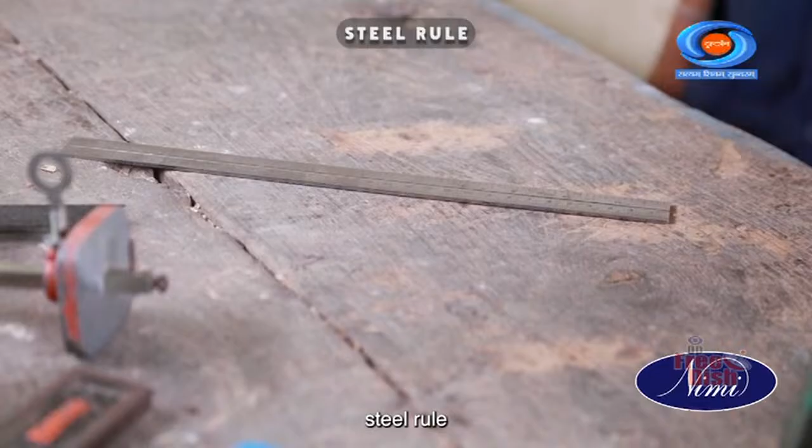Before we begin making the common dovetail joint, let us first have the tools ready in hand. The tools which we need are marking knife, steel rule, measuring tape, pencil, try square, cross-cut saw, bevel edge chisel, mallet, vise or bench vise, and jack plane.

Let's begin by taking two wooden pieces. Cut and trim them to the required size. Step 1: The first stage is to mark out and cut the tail.

Place one piece of wood vertically on top of the other as shown. Draw a line on the horizontal piece A that marks the thickness of the vertical piece B. Now use the marking knife or marker pencil to mark the dovetail.

Step 2: Repeat the same procedure for wooden piece B as done for wooden piece A. Place wooden piece A vertically on top of wooden piece B as shown and mark the line with the marker pencil.

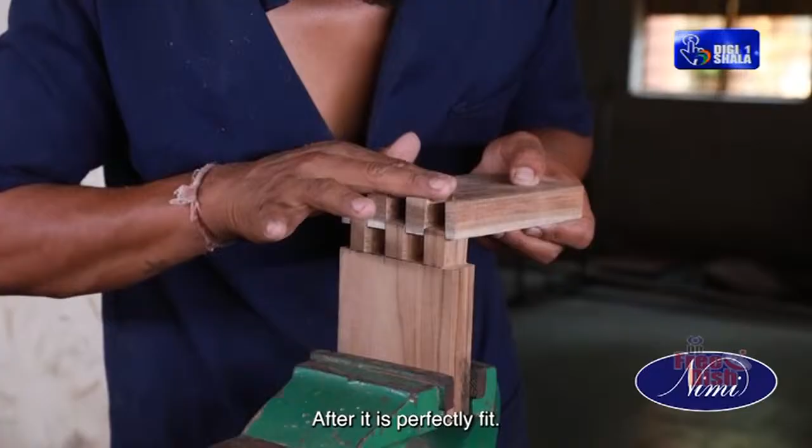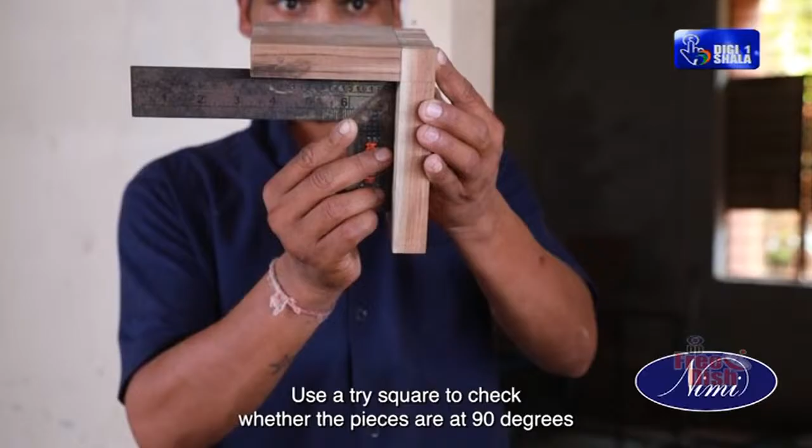use a try square to check whether the pieces are at 90 degrees with each other. Now you have the common dovetail joint made ready.

Let's quickly recap.

In this video, we have learned how to make a common dovetail joint and also the simple technique to make it. Hope you have understood everything taught in this session.

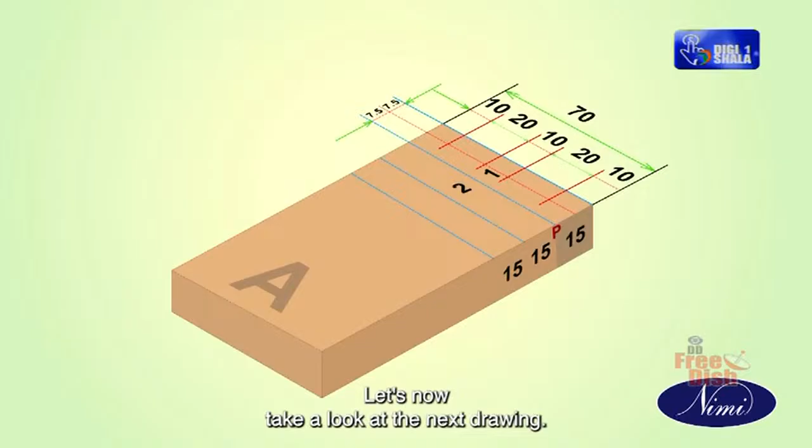Let's now take a look at the next drawing. Draw a line at a distance of 15 millimeters from line P, and label this region between the two lines as 2. Now draw another line at a distance of 15 millimeters away from the new line we just drew, and name the area between these lines as 3.

Now separate the new line into 2 equal parts. With try square and the scriber, mark only the lines indicated with thick green lines as shown on the drawing, using the marking knife or marking pencil. Then the regions inside 1 and outside the 20 millimeters lines can be shaded using a pencil.

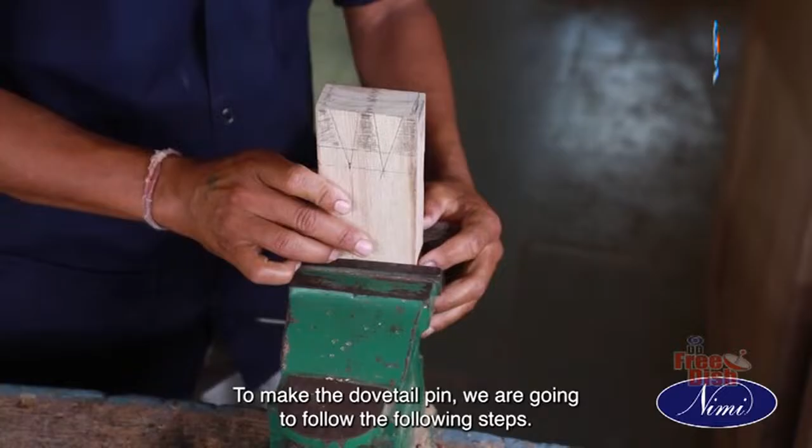Now we need to make the dovetail pin on the wooden piece A. To make the dovetail pin, we follow these steps: fix the piece A vertically in the vise or bench vise.

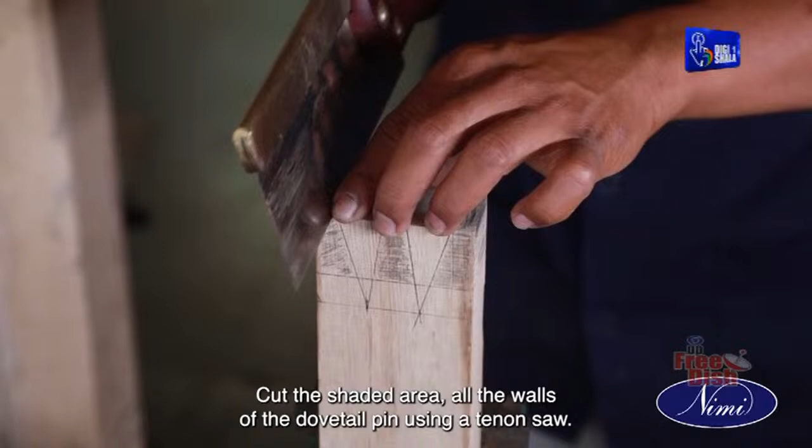Cut the shaded area, all the walls of the dovetail pin using a tenon saw. Saw on the waste side of the marking outline, perpendicularly to the sides of the piece and up to the gauge line. Remember to cut a little away from the line so that you can finish off neatly with a chisel later.

Chisel out the waste of the dovetail pin with a bevel edge chisel or firmer chisel. Cut out small pieces of waste until the gauge line is reached. Repeat the procedure for the other dovetail pins also. If necessary, clean the dovetail with chisel and mallet.

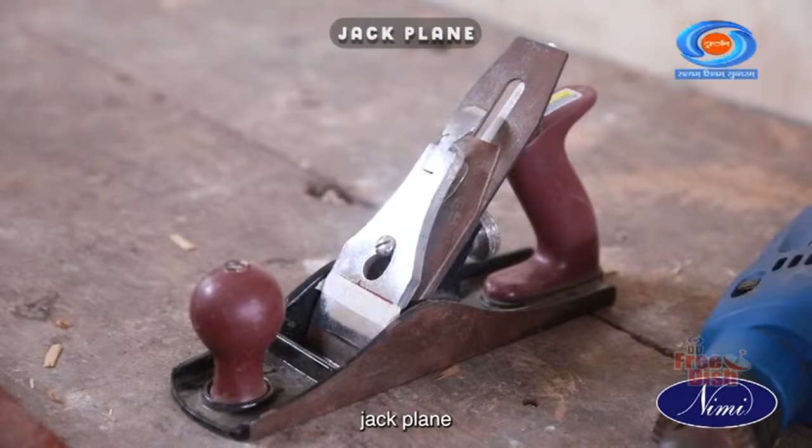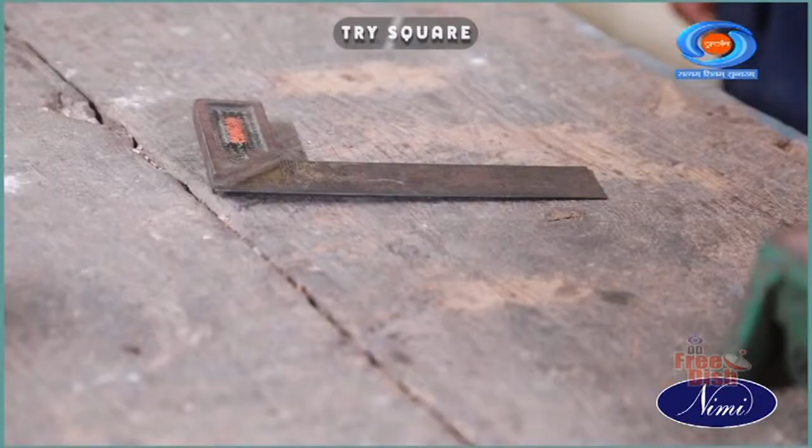Let's start. Gathering equipment needed to make rebate butt joint: wooden piece of dimension 80 x 20 x 450 mm, 2 numbers; jack plane; marking knife; bench vise; rebate plane; steel scale; measuring tape; try square; smoothing plane; wood glue; bench stop.

Making the rebate butt joint. Check the wooden pieces for its size. Use measuring tape for checking the dimensions. Plane it to size of 80 x 20 x 450 mm, 2 numbers, using jack plane.

Hold both the planks side by side in a carpenter's vise. Then mark a section of width 20 mm throughout the length of both the wooden pieces.

Then mark a depth of 10 mm along the sides that were marked in the previous step. We should get wooden pieces as marked in the diagram.

Keep the marked plank against the bench top on the workbench. Take a rebate plane of adjustable type and make the rebate on both sides. Check its squareness and flatness of the rebate with try square. Repeat all the previous 3 steps on the other piece of wood as well.

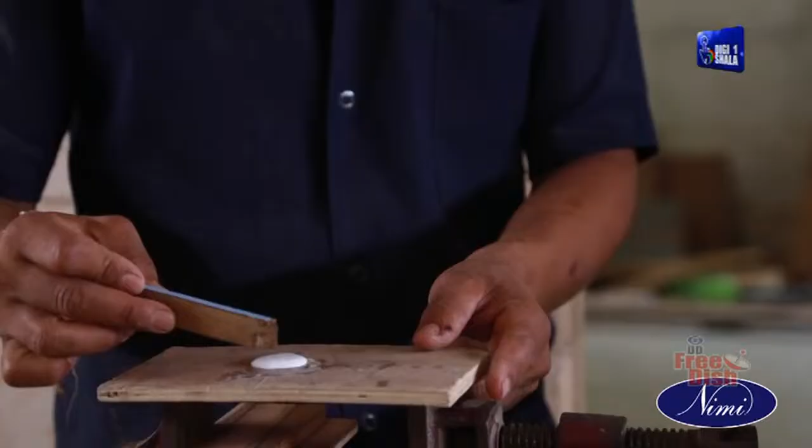Keep both the planks together and check its alignment. Apply glue on the rebate part of both the planks and fix both the planks along its rebate. Just move to and fro to spread the glue evenly and clamp it.

Allow glue to dry, then remove the clamp. Once the glue has dried, finish the joint using smoothing plane.

Facts about rebate butt joint. The rebate joint is usually used as a corner joint because rebate joint in itself is quite weak. It is usually strengthened with nails, screws or staples. These strengtheners also bind the joint while the glue is hardening. It is also possible to use dowels as strengtheners if the dimensions of the joint allow that.

Application of rebate butt joint. It is used in a variety of projects including widened joints, framing, carcase construction, timber paneling, securing two narrow pieces together, and corner joints.

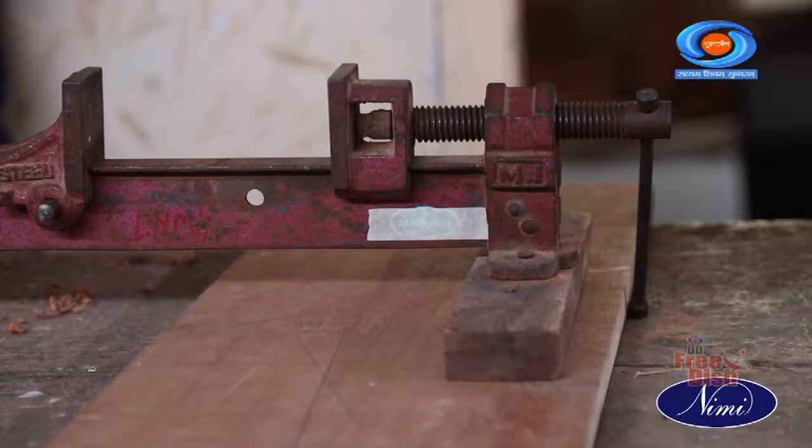Let's start. Gathering equipment needed to make secret pocket screw butt joint: wooden piece of dimension 90 mm x 20 mm x 450 mm, 2 numbers; jack plane, pencil, T-clamp, mallet, firmer chisel, 35 mm x 8 mm screws (3 numbers), tri-square, ratchet brace, screwdriver, straight edge, and measuring tape.

Making the secret pocket screw butt joint. Check the dimensions of the two wooden pieces and make sure that it is of the size 90 mm x 20 mm x 450 mm. If not, then plane it until we reach the required size.

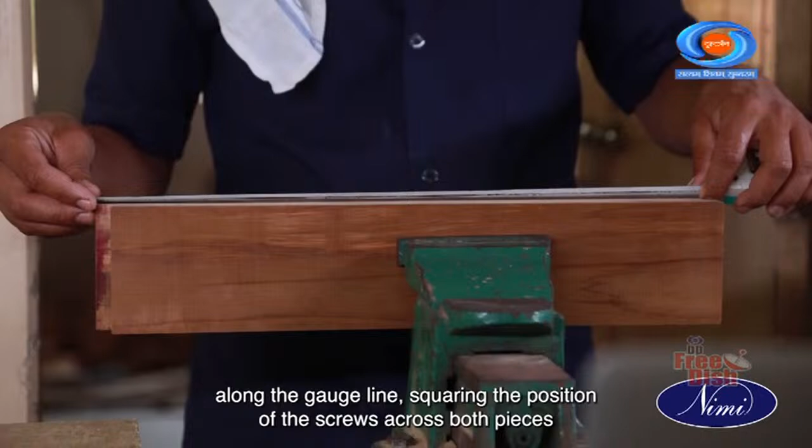Mark the distances 50 mm, 225 mm and 400 mm along the gauge line, squaring the position of the screws across both pieces using a tri-square and pencil.

Make 3 pilot holes of diameter 2 mm at 50, 225 and 400 mm as shown in the sketch, to a depth of 25 mm using hand drill.

Fix the 35 x 8 screws on the pilot hole and drive it to a depth of 25 mm on the plank using a screwdriver. The length of the screw above the wood in plank B should be slightly less than the depth of hole in A.

Adjoining the hole, mark a slot of size 10 mm x 8 mm x 20 mm on the right side of the hole. Chop off the slot wood layer by layer using firmer chisel up to the required thickness.

Assemble the plank so that the screw head of plank B enters the bore of plank A. Clamp parts A and B at equal levels. Tap gently the part B to the left using T-bar clamps.

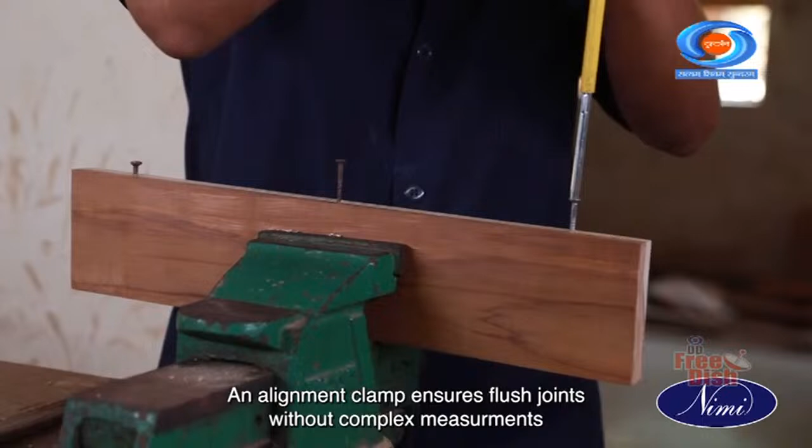Application of secret pocket screw butt joint: face frame construction, table aprons, drawer box, utility cabinets, and wooden furniture.

Let's quickly recap. To make a secret pocket screw butt joint, take 2 wooden planks. In the first wooden plank, mark them for drilling and drill pilot holes of 2 mm diameter. Insert a 35 mm by 8 mm screw, driving it 25 mm deep into the plank.

Clamp them together and use a wooden mallet to align them, then remove the clamp and check for its flatness. Hope you understood everything taught in this session.

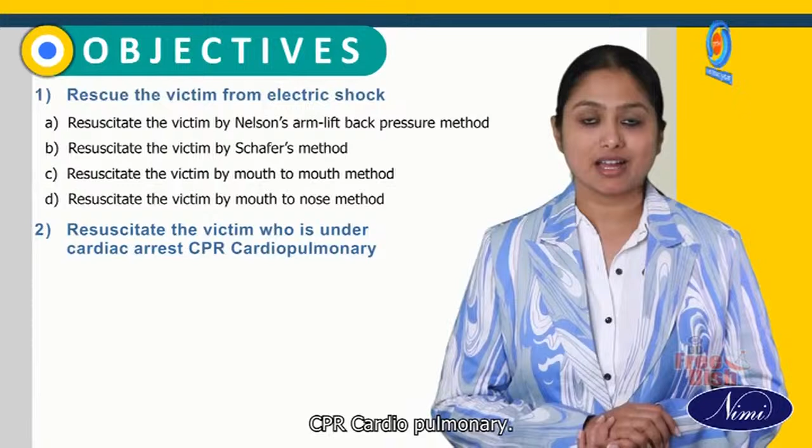The objectives of this video are: after the session you will be able to rescue the victim from electric shock, resuscitate the victim by Nelson's arm lift back pressure method, resuscitate the victim by Schafer's method, resuscitate the victim by mouth-to-mouth method, resuscitate the victim by mouth-to-nose method, resuscitate the victim who is under cardiac arrest using CPR, cardiopulmonary treatment for a victim who is bleeding, and using a fire extinguisher to put out fires.

Practice on workshop safety and discipline. Let's start: rescue the victim from electric shock.

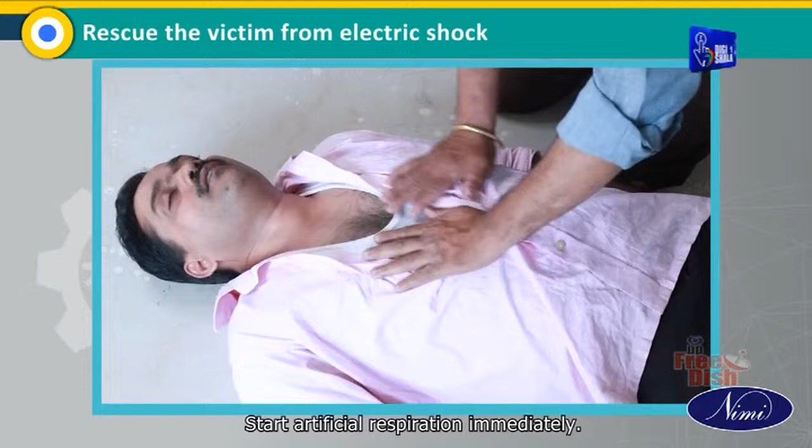Loosen clothing that may interfere with the victim's breathing. Remove any object, including false teeth, from his mouth. Bring him to ground level. Start artificial respiration immediately and call for a doctor.

Resuscitate the victim by Nelson's arm lift back pressure method. Place the victim as shown. Kneel such that your knees are near the victim's hands.

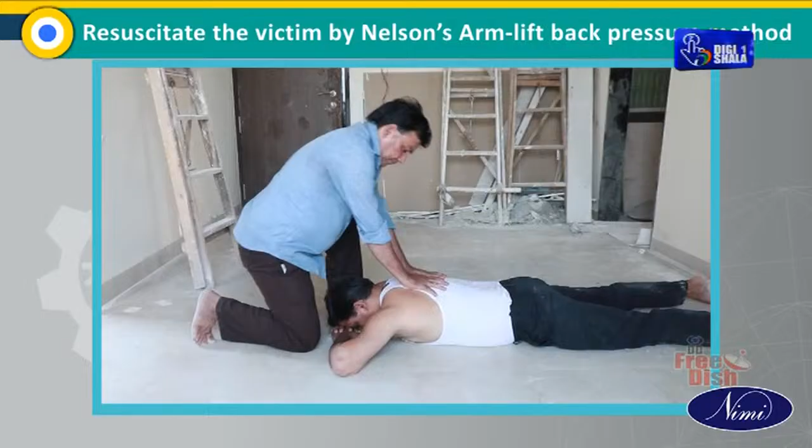Place your hands on the back of the victim. Gently bend forward, keeping your arms straight until they are nearly vertical and steadily pressing the victim's back. When bending back, your hands should slide down the victim's arms and grasp his upper arm just above the elbows.

When you bend back completely, pull the victim's arms towards yourself gently. To complete the cycle, lower the victim's arms and move your hands back to the initial position. Do this until the victim starts breathing naturally. Do not give him any stimulant until he is fully conscious.

Resuscitate the victim by Schafer's method. Place the victim and kneel over them as shown. The victim's thighs should be between the rescuer's knees. Place the hands and fingers as shown.

Gently bend forward, keeping your arms straight until they are nearly vertical and steadily pressing the victim's back. This forces air out of the victim's lungs. When you bend back completely, remove all the pressure on the victim. This allows air to fill back into the lungs.

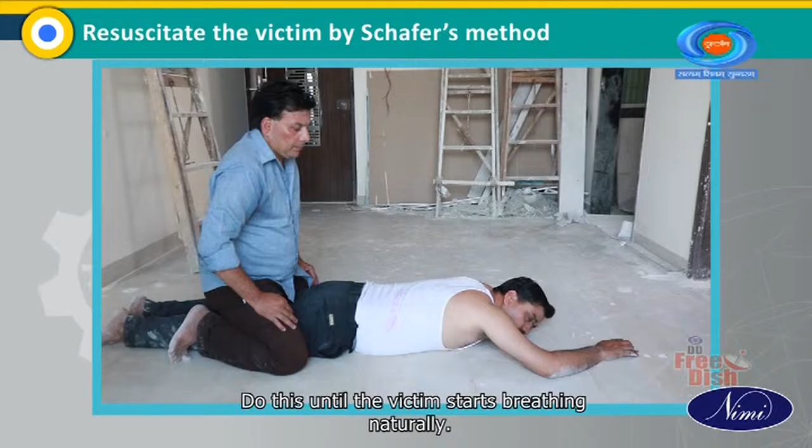After 2 seconds, swing forward again and repeat the cycle 12 to 15 times a minute. Do this until the victim starts breathing naturally.

Resuscitate the victim by mouth-to-mouth method. Place the victim as shown. Tilt the victim's head back. Use your fingers to position the upper and lower jaws as shown.

Take a deep breath and place your mouth over the victim's mouth as shown, making airtight contact. Close the victim's nose. If you dislike direct contact, place a porous cloth over the victim's mouth. For an infant, place your mouth over his mouth and nose.

Blow into the victim's mouth gently, in case of an infant, until his chest rises. Remove your mouth and release the hold on the nose to let him exhale, turning your head to hear the rushing out of air. The first 8 to 10 breaths should be as rapid as the victim responds. Thereafter, the rate should be slowed to about 12 times a minute, 20 times for an infant.

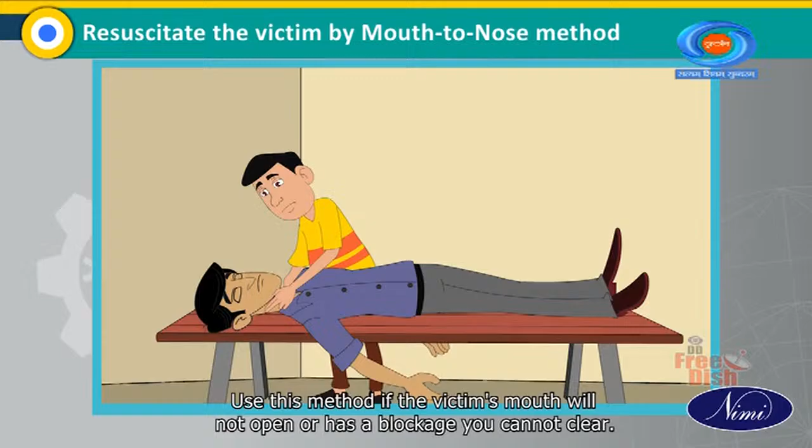Resuscitate the victim by mouth-to-nose method. Use this method if the victim's mouth will not open or has a blockage you cannot clear. Use your fingers to shut the victim's lips. Firmly place your lips around the nostrils and breathe into them. Note if the victim's chest is rising and falling. Repeat this 10 to 15 times until the victim responds. Continue this exercise till the arrival of the doctor.

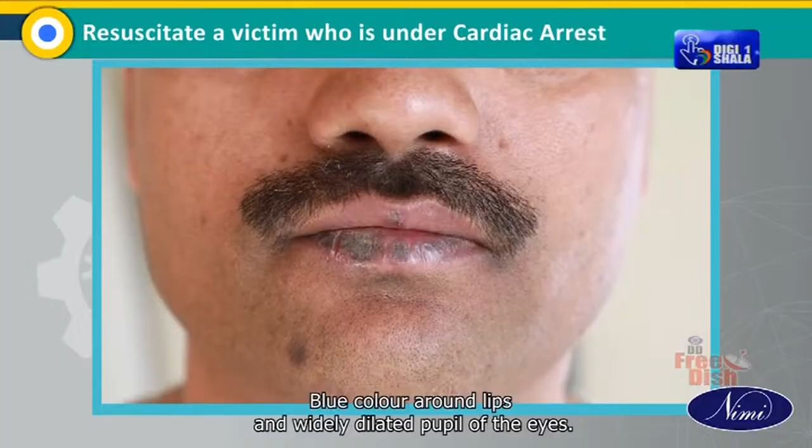Resuscitate a victim who is under cardiac arrest. Check quickly whether the victim is under cardiac arrest. In cases where the heart has stopped beating, you must act immediately. Cardiac arrest could be ascertained by the absence of the cardiac pulse in the neck, blue color around lips, and widely dilated pupil of the eyes.

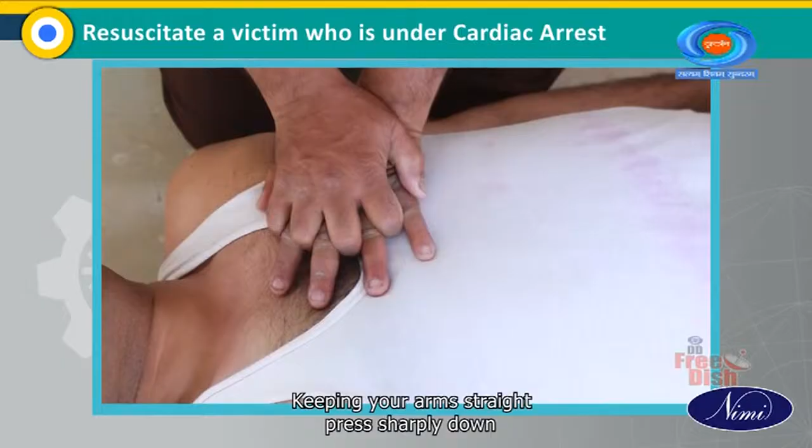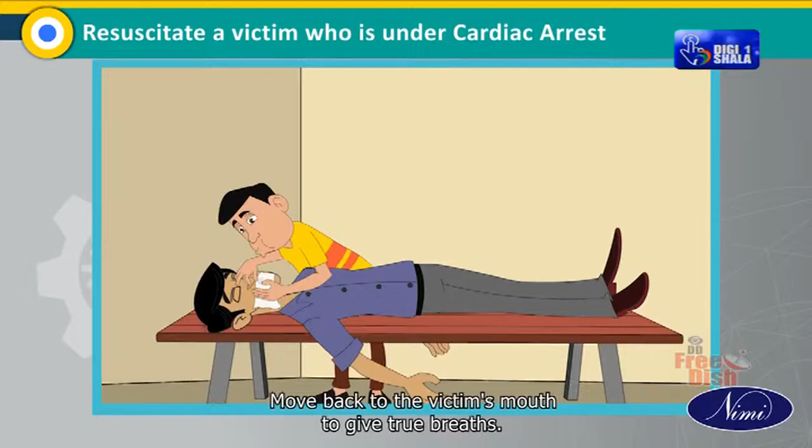Lay the victim on their back on a firm surface. Kneel alongside facing the chest and locate the lower part of the breastbone. Keeping your arms straight, press sharply down on the lower part of the breastbone, then release the pressure. Repeat the previous step 15 times at the rate of at least once per second. Check the cardiac pulse. Move back to the victim's mouth to give two breaths, mouth-to-mouth resuscitation.

Continue this cycle of 15 chest compressions followed by 2 breaths. Check the pulse frequently. Stop the compression if the heartbeat returns and stop the mouth-to-mouth breathing if natural breathing returns. Place the victim in the recovery position as shown. Keep him warm and get medical help quickly.

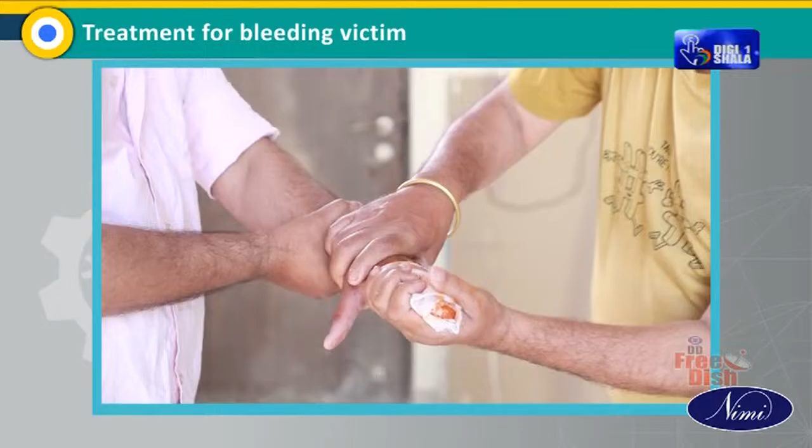Treatment for a bleeding victim: determine the location of the bleeding. Elevate the injured area above the heart if possible. Apply direct pressure to the bleeding area with a sterile cloth. Keep the pressure on for 5 minutes. Check to see if the bleeding has stopped. If not, apply further pressure for 15 minutes.

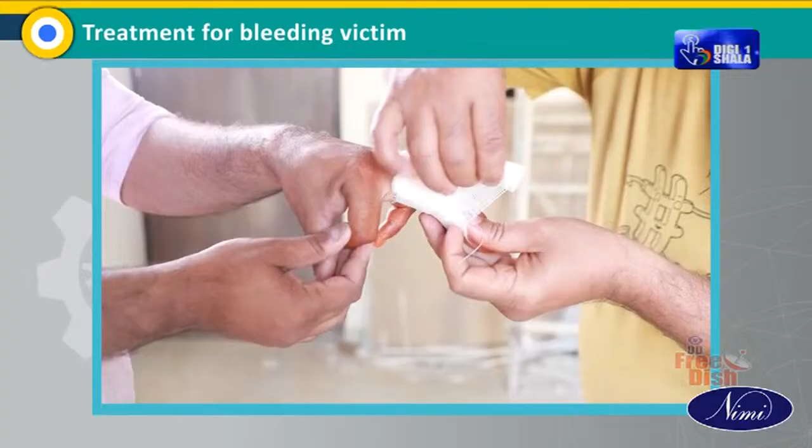Clean the wound. Bandage the wound with a pad of soft material. Advise the victim to take treatment from the doctor.

Use of fire extinguisher: alert the people around you when you see fire by shouting "Fire, fire, fire, fire." Then immediately inform the fire service. Tell the people to go away using the emergency exits. Put the electrical power supply in off position. Do not allow people to go near the fire.

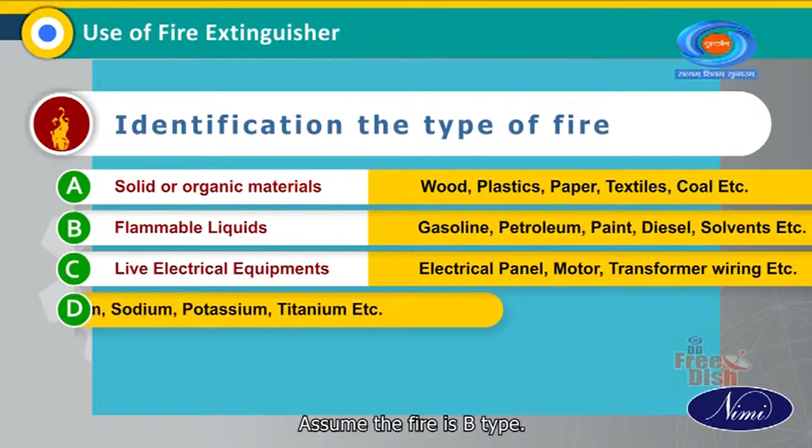Identify the type of fire. Refer to Table 1, assume the fire is B-type. Select CO2, carbon dioxide, fire extinguisher. Check for its expiry date. Break the seal and pull the safety pin from the handle.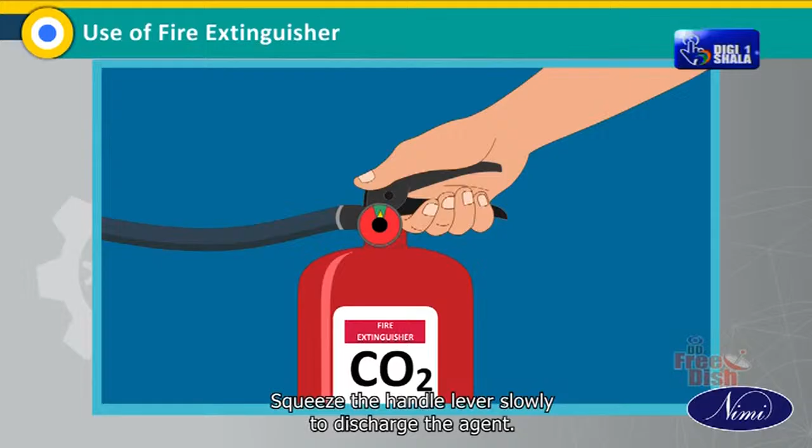Aim the extinguisher nozzle or hose at the base of the fire. This will remove the source of the fuel fire. Squeeze the handle lever slowly to discharge the agent. Sweep side to side approximately 15 cm over the fuel fire until the fire is put off.

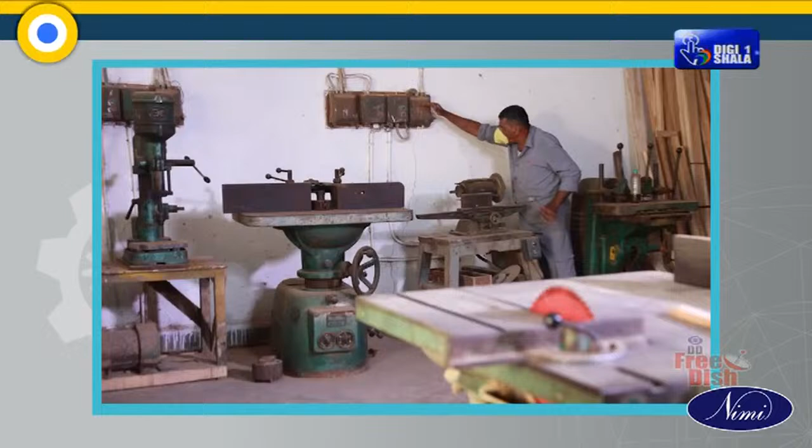Practice on workshop safety and discipline. Switch off all the machinery and equipment before starting the cleaning process. Use a mask to cover the mouth and nose.

Identify the areas, equipment, and machines that need to be cleaned. Keep the movable items in one place and group them. Clean the dust carefully without damaging any part or connection in the machine or equipment using a cloth. Use a dry dusting cloth on areas that are wired.

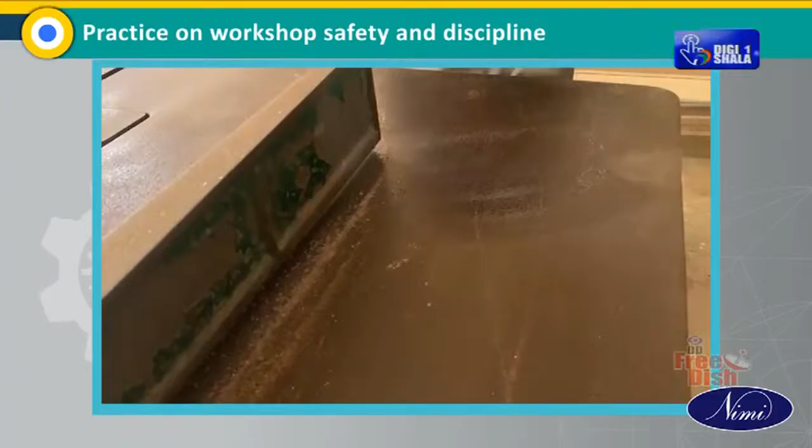Remove rust on the parts of the equipment or devices using an emery sheet. Do not remove lubricants in the machine while wiping or cleaning. Use vacuum cleaners to suck dust from the areas where a brush or cloth cannot help.

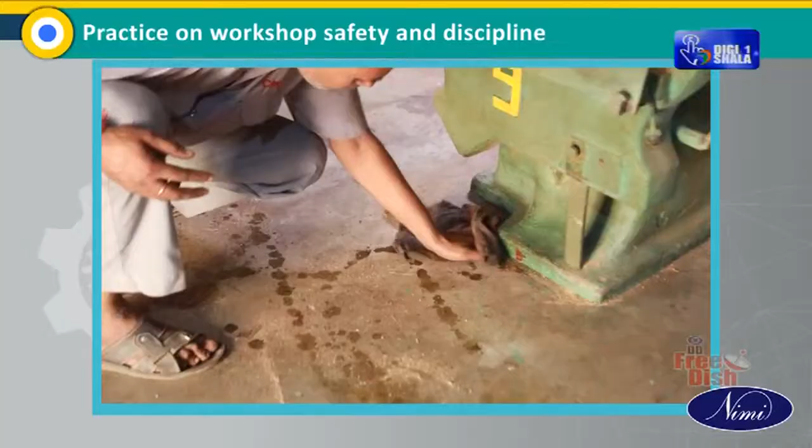Collect the waste materials found in the lab and put them in the specified dustbin. Clean places where grease or oil has been spilt on the floor. Put all the materials and equipment used for cleaning in their respective places.

Inspect and ensure that all machines are working after cleaning, in the presence of the instructor. Discuss any abnormal things that you came across while cleaning with the instructor. Prepare a report if the instructor asks for it.

Recap: in this video, we learned crucial first aid and basic skills covering electric shock rescue, resuscitation methods, cardiac arrest response, bleeding treatment, fire extinguisher use, and workshop safety. This video emphasizes practical techniques for immediate response.

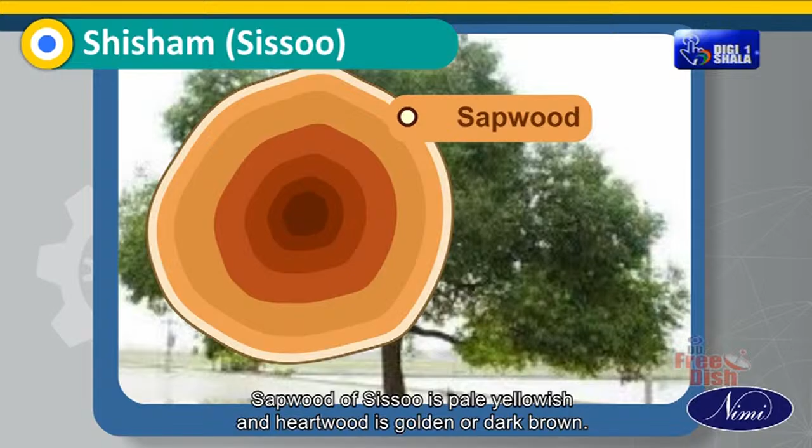Shisham. Shisham typically grows along roadsides, a tree with a short trunk and large branches. Sapwood of Sissoo is pale yellowish and heartwood is golden or dark brown. It is hard and heavy wood with an average density of 780 kilograms per cubic meter, exhibiting a medium coarse texture with fairly straight interlocked grains.

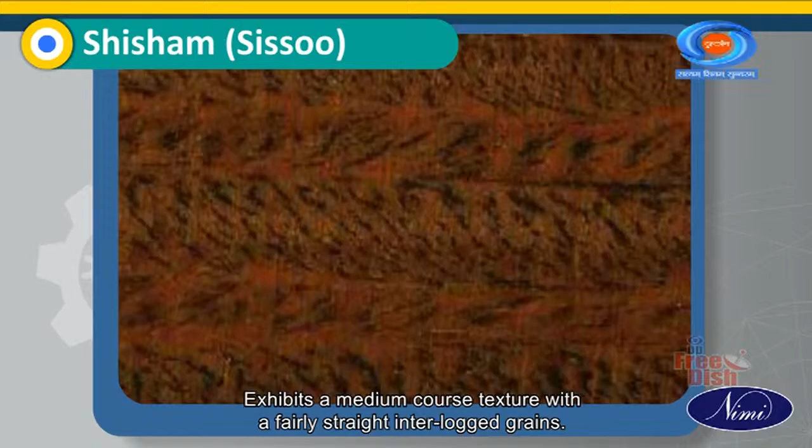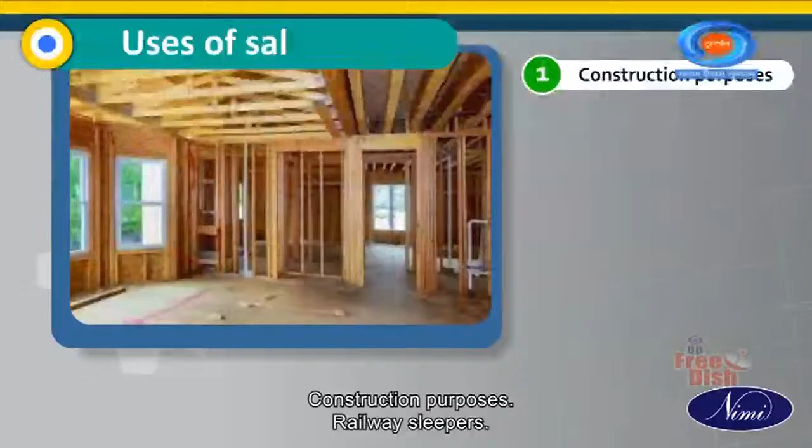Sal. A straight growing, upright tree. Sapwood is pale yellowish and heartwood is brown or reddish brown. It is hard and heavy wood with an average density of 855 kilograms per cubic meter, exhibiting a coarse texture with interlocked grains. Sal is a valuable timber recommended for all construction purposes, railway sleepers. Babul.

Babul characteristics: note that the leaves of this tree are very small. Also note that the trunk of babul is relatively small, so the wood from babul is not available in large shapes. It is abundantly found throughout India. The wood has a closed grain and is tough, with a pale red color, weighing approximately 785 kilograms per cubic meter. Uses of babul: tool handles, wheels, bodies of carts, plows, etc.

Mango. Mango trees are found all over India. The wood is of inferior quality, coarse and open-grained, meaning it has large pores. The color of the wood is yellowish grey and it weighs about 690 kilograms per cubic meter. It contains a large amount of moisture and sap. Uses of mango: inferior quality doors and windows, packing cases, etc.

Bamboo. These trees are found in practically all parts of India. It is a flexible and strong material that grows naturally on soils which are neither too acidic nor too alkaline. The greater concentration of bamboo is, however, found in the Assam region. It is used for making the poor man's hut all over the country. Uses of bamboo: walls, flooring, ceiling, roofing, ladders, basket-making, mats, walking sticks, umbrella handles, toys, paper pulp.

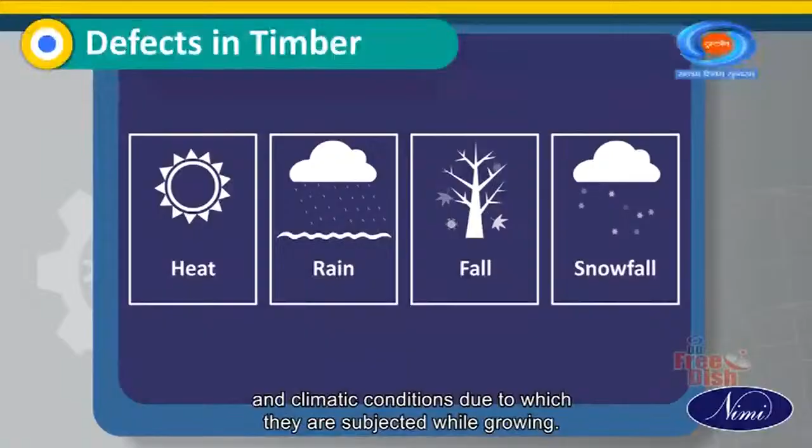Defects in timber: Natural defects occur in all kinds of timber depending upon the soil upon which they grow and climatic conditions to which they are subjected while growing. A defect is any irregularity occurring in or on the timber. Defects reduce the strength, durability, and so the utility value of the timber. Causes of these defects are lightning, strong winds, fires, diseases, insects, fungi, etc.

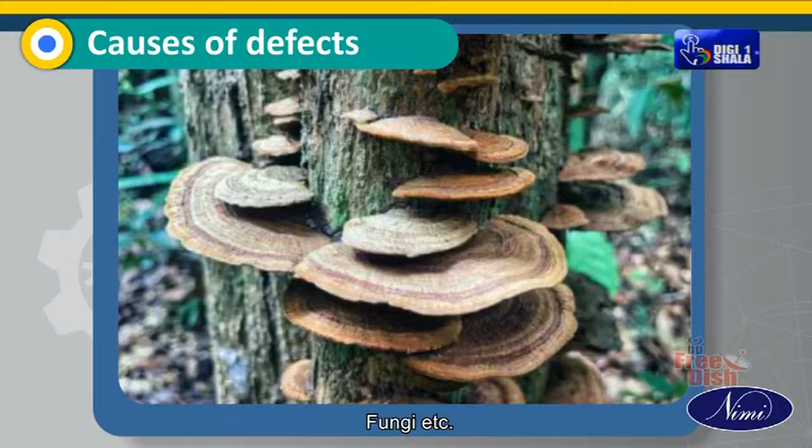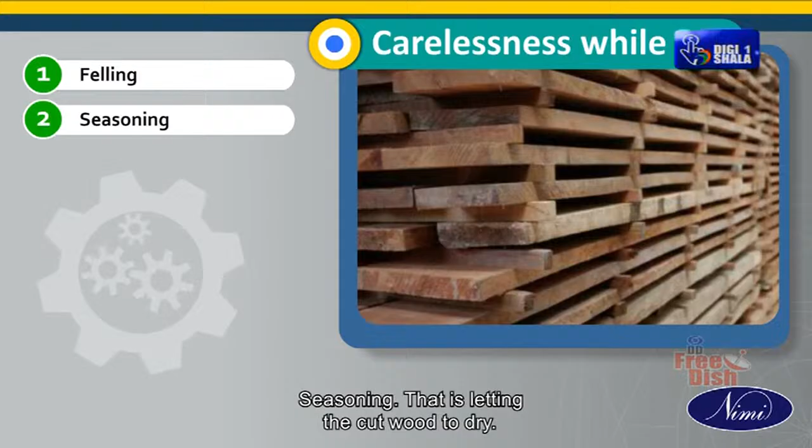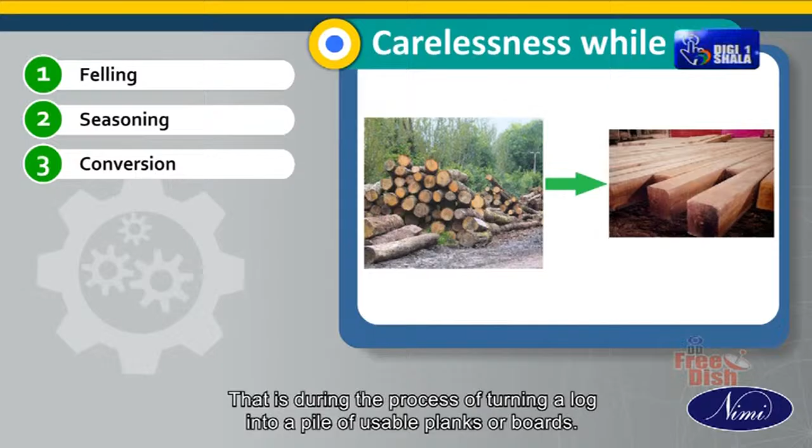Other causes include carelessness while felling, that is when cutting down the tree; seasoning, that is letting the cut wood dry; conversion, that is during the process of turning a log into a pile of usable planks or boards; and fungi and insects.

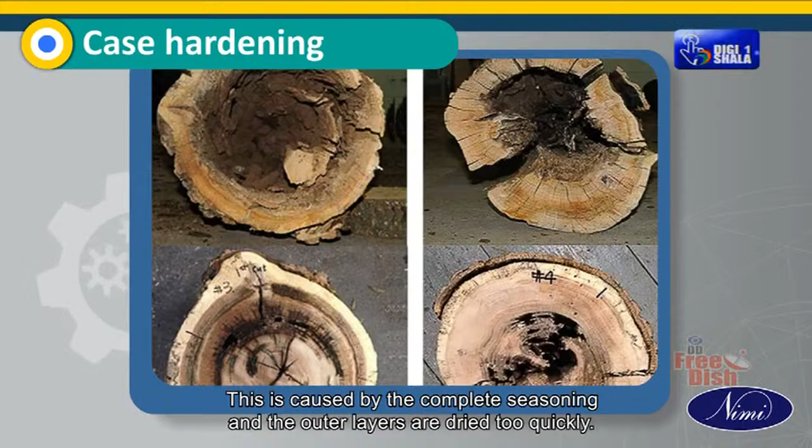Let us look at some common defects. First, burls. Due to some injury or irritation of the trunk, an abnormal growth is formed on the side of the tree. This is called burls. Case hardening is a condition of the outer layer of timber that is abnormally hard, caused by incomplete seasoning where the outer layers are dried too quickly.

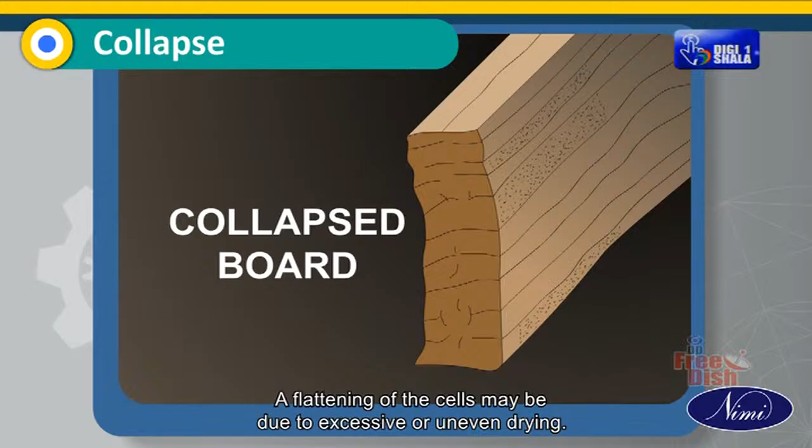Collapse: a flattening of the cells, may be due to excessive or uneven drying. This may be prevented by drying at low temperature.

Bowing: a curvature from the plane along the wide surface of the board. This is caused due to uneven shrinkage and uneven drying during seasoning, and the board not being cut parallel to the growth rings.

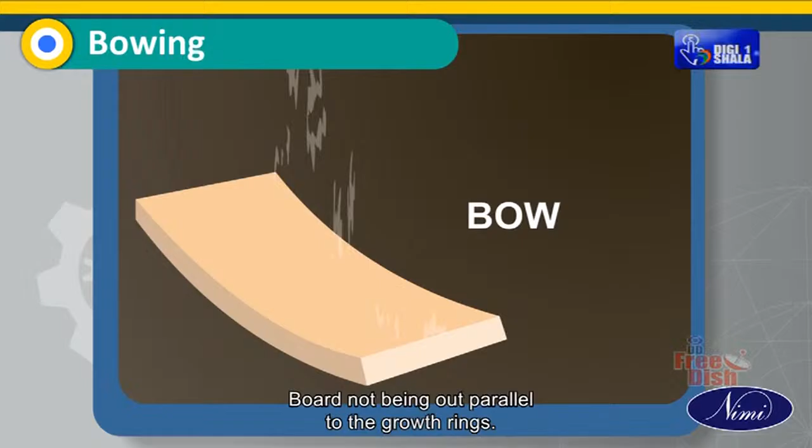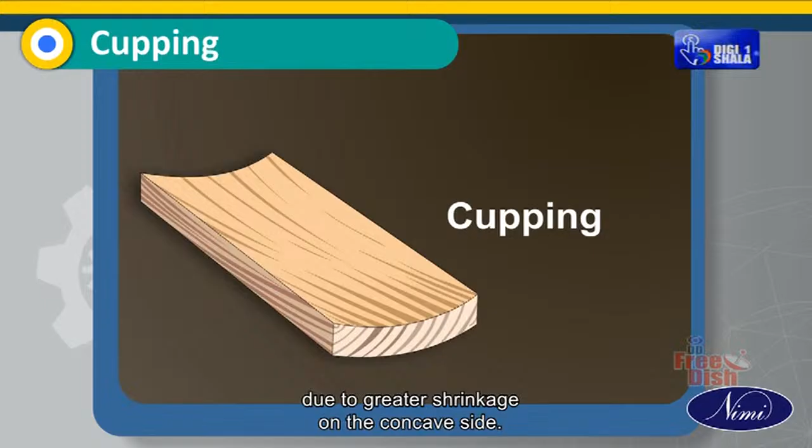Cupping: a simple curvature across the width of the board due to greater shrinkage on the concave side. It is more pronounced in back sawn boards.

Spring: a curvature along the edge of the board not affecting the face, which remains flat, caused by uneven shrinkage and poor drying of the timber.

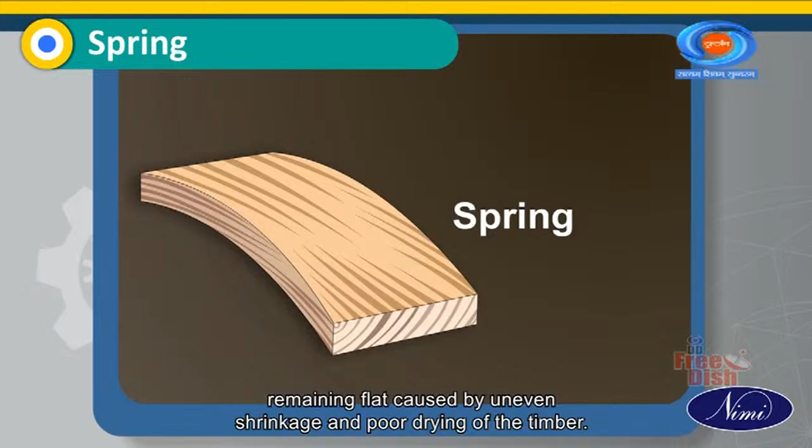Twisted fibers: this defect is due to the tree being twisted constantly in one direction by the force of prevalent wind, causing a spiral distortion along the length of the piece of timber. This may also be caused by uneven shrinkage due to uneven drying.

Grain refers to the direction of the cells and vessels of the wood. Cross grain is when the wood has varying inclinations to the axis of the wood piece due to cutting from timber in which the straightness of the grain is imperfect.

Diagonal grain is when the fibers in the wood do not run parallel to the axis of the wood piece, even though it was cut from straight grain timber. This is caused by cutting parallel to the axis of the log instead of parallel to the bark.

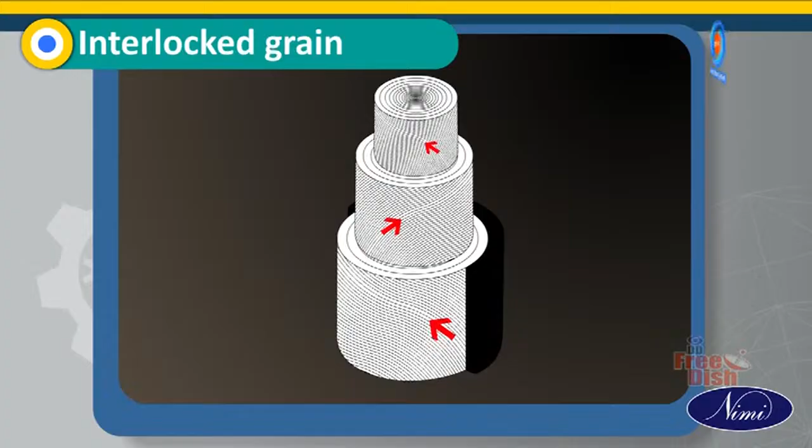Interlocked grain is when the fibers of adjacent layers of wood are spirally inclined in opposite directions. This grain surface is difficult to plane. An example of this is Queensland maple, which gives a ribbon stripe figure.

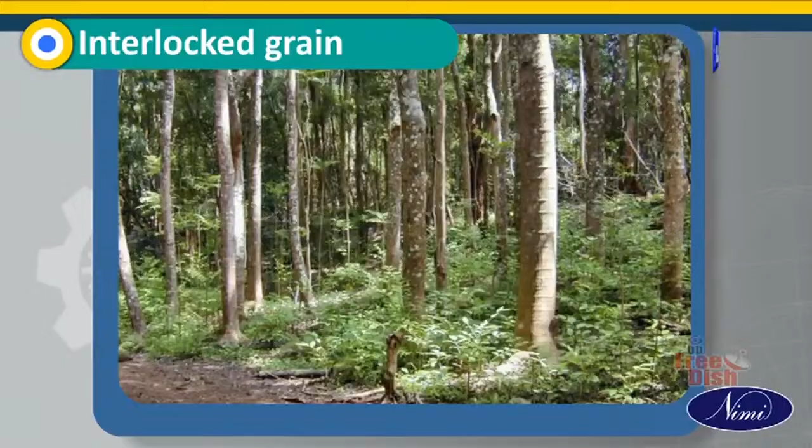Spiral grain occurs when the fibers have taken a spiral course in the tree trunk, as if the tree has been twisted. The cause is not definitely known.

Wavy grain is a wavy arrangement of the fibers, also known as curly or fiddleback grain. This grain surface is difficult to plane and work.

Waney edge. This defect lies in the sapwood which accompanies wane due to economical conversion of logs.

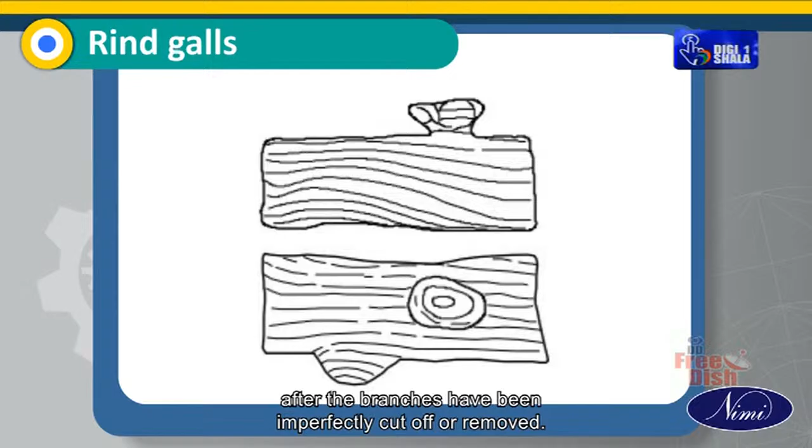Rind galls are peculiar curved swellings found on living trees, generally caused by the growing layer covering over the wounds left after branches have been imperfectly cut off or removed.

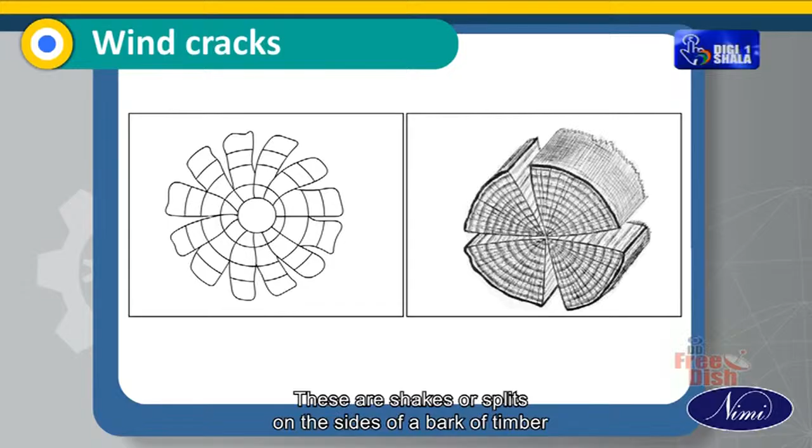Wind cracks are shakes or splits on the sides of the bark of timber due to the shrinkage of the exterior surface exposed to atmospheric agencies like sun and wind, etc.

Recap: first, we looked at different types of trees which give us wood, like teak, deodar, chir, kail, shisham, sal, babul, mango and bamboo. Then we saw the types of defects.

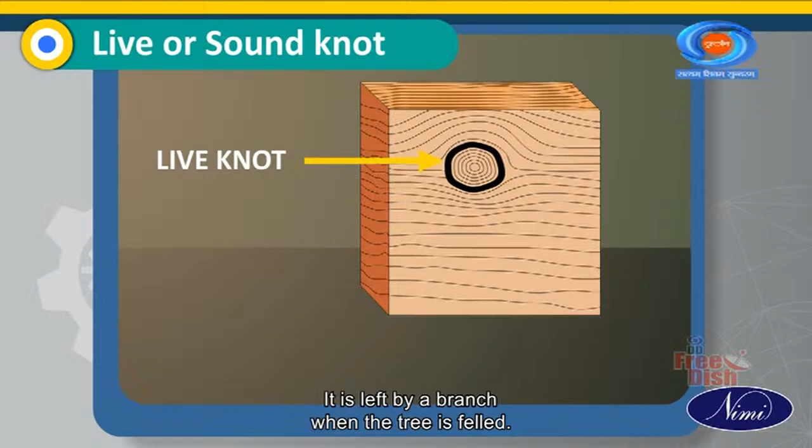Live or sound knot is left by a branch when the tree is felled. It is solid across its face and hard as the timber surrounding it, and it is free from decay. Knots are considered to add beauty and effect in the final appearance.

Shakes. Shakes are the partial or complete separation between adjoining layers of wood. This is due to the relief of growth stresses present in the stem at the time of felling.

Heart shake: these are the cracks or splits in the center, starting from the pith and extending in the direction of the medullary rays in one or opposite directions towards the sapwood. Such defects are found in over-matured trees, but sometimes they may be caused by quick drying of the central part of the tree. This defect is caused due to shrinkage of heartwood.

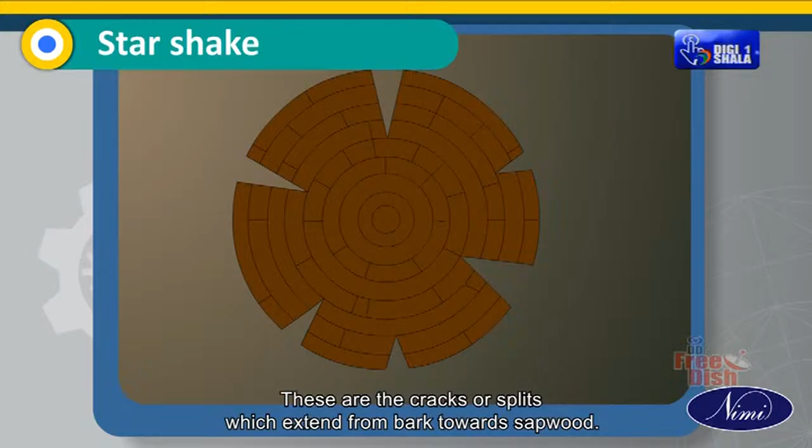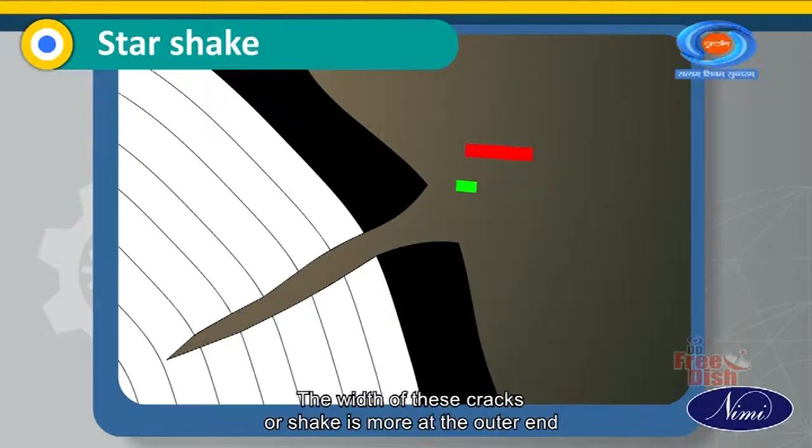Star shake: these are cracks or splits which extend from the bark towards the sapwood. This defect is caused when the tree is subjected to severe heat or frost during its growth. The width of these cracks is more at the outer ends and reduces as they extend towards the center. We can see that here.

Cup shake or ring shake: these are formed by the rupture of tissue in a circular direction across the cross section of a log. It forms usually along the annual rings.

Radial shake is similar to star shake, but it occurs due to exposure to sun when felled timber is placed for seasoning. Many cracks run for a short distance from the bark towards the center, then follow the course of an annual ring and lastly go towards the center radially. When the rupture extends only part round, it is called cup shake; when it goes the whole way round or almost so, it is called ring shake.

This defect is caused either due to unequal growth or due to sudden contraction of timber under atmospheric changes, assisted by twisting action due to wind.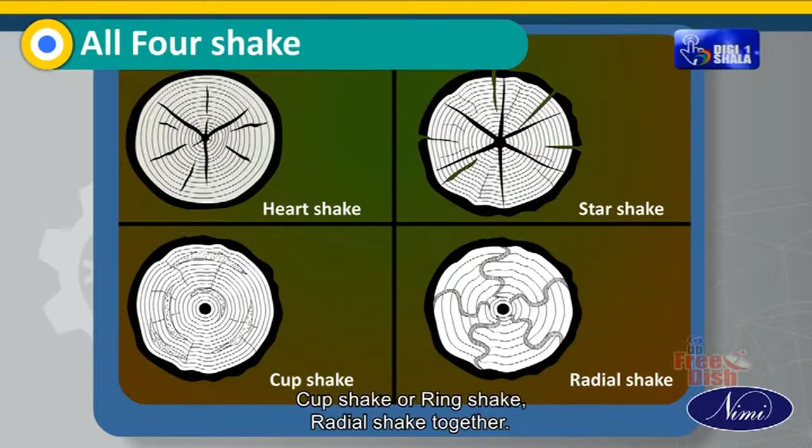Let us look at heart shake, star shake, cup shake or ring shake, and radial shake together. Check is the separation of the wood extending for a few inches or centimeters along the grain, formed while drying.

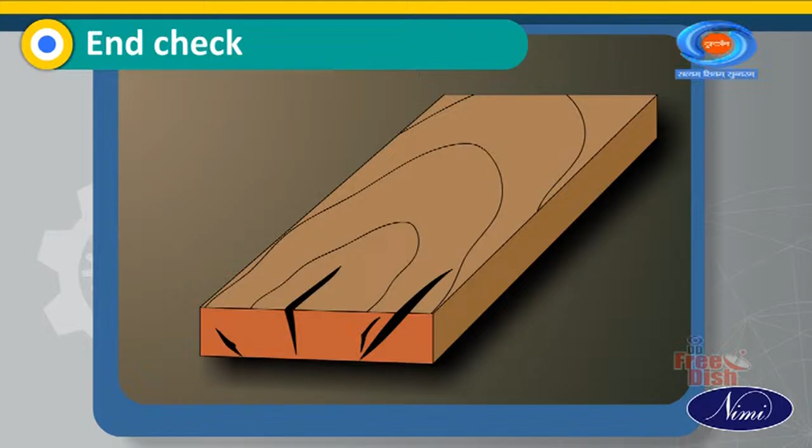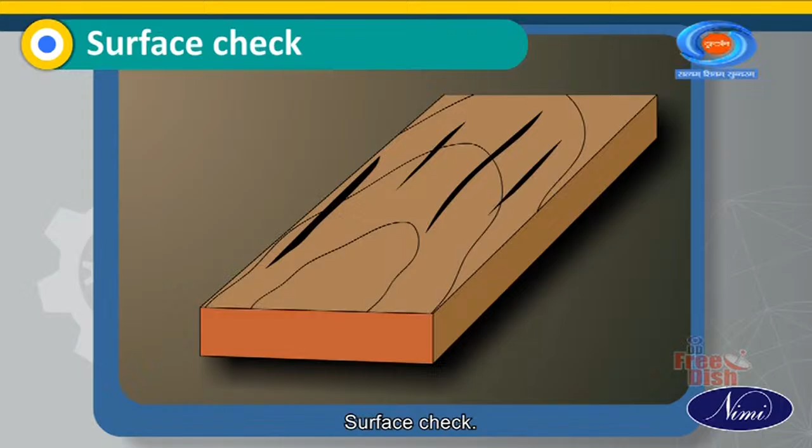End check occurs on the end of the piece of timber. Internal check occurs in the interior of the piece. Surface check occurs on the surface of the piece. Through check extends through the piece from one surface to the other.

Here is a glance of all the checks together: end check, internal check, surface check, through check.

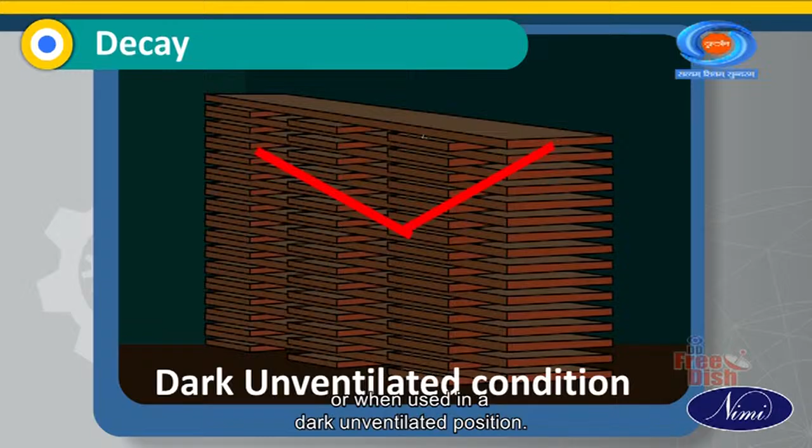When timber is kept in a place which has alternating dry and wet conditions, or when used in a dark, unventilated position, these alternating conditions make the timber vulnerable to diseases like dry rot and wet rot.

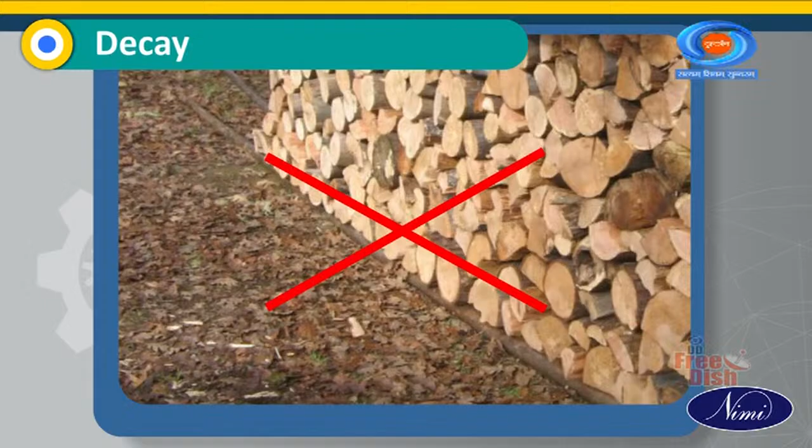Dry rot occurs when there is improper ventilation. Because of improper ventilation, there is growth of fungus which eats the fiber of the timber and reduces it to powder. The process of dry rot is accelerated by the growth of fungus, but the origin of the disease

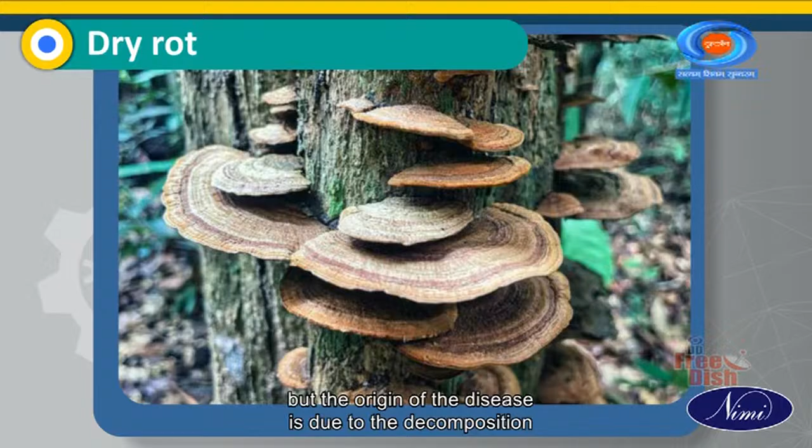is due to the decomposition of the sap in the timber. The food for the growth of fungi is supplied by this decomposition. Tremendous destruction of the timber is caused by this highly infectious disease.

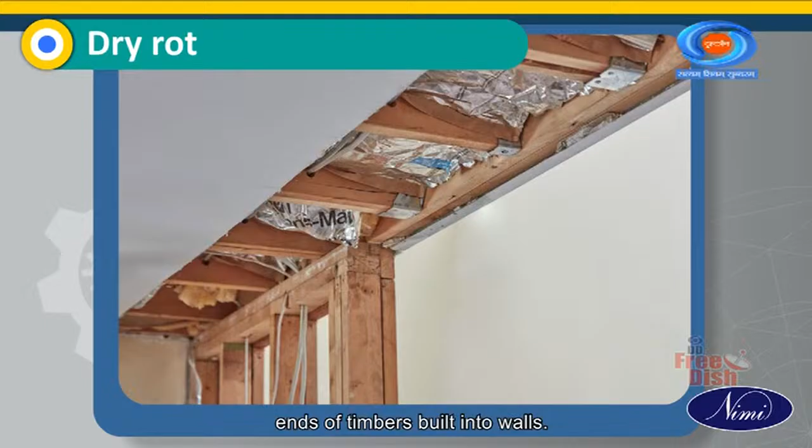This disease may develop in seasoned timber or unseasoned timber treated with preservatives. This disease is common in warm cellars, basements, and ends of timbers built into walls.

This disease can be detected by tapping at one end of the timber, post or log and hearing the sound on the other end. If a distinct sound is heard when tapping, it indicates good timber, and if a dull sound is heard, it is a sign of decayed or diseased timber.

The following methods can be adopted to prevent or eradicate this disease: allowing free circulation of air, cutting off portions of wood attacked by dry rot and painting the remaining portion with copper sulfate, and exposing the infected portion to sunlight and cleaning of fungus.

Wet rot is the result of decomposition of timber caused by damp and moisture. This disease is further accelerated by alternate dry and wet conditions.

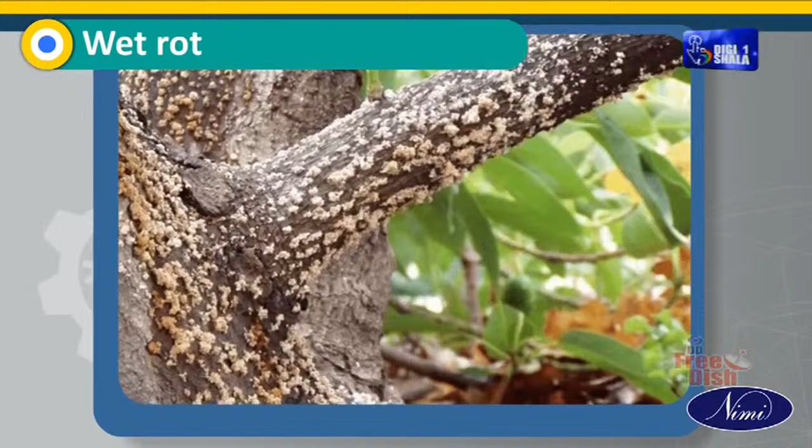The portion of the timber attacked by wet rot reduces to grayish-brown powder. In this disease, the timber is decomposed while wet and then scales when it dries. This disease can develop in timber whether dead or alive.

All types of timber used or kept in uncovered situations are likely to be exposed to rain and hence subjected to wet rot. By removing sap from timber through seasoning first and then treating it with preservatives, wet rot can be prevented.

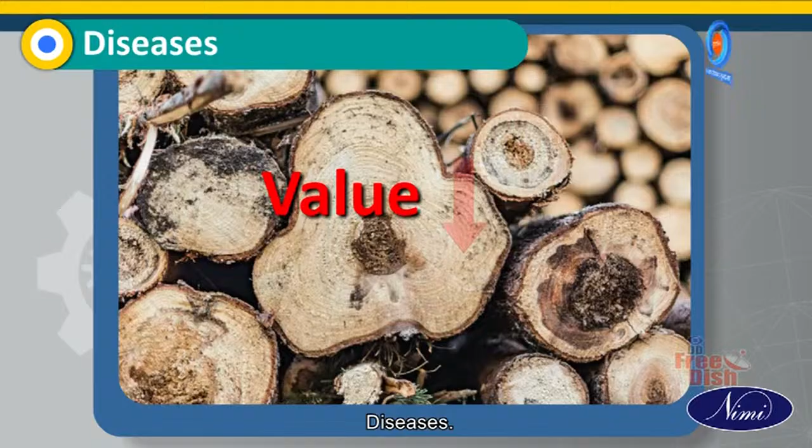When timber is said to decay, its value as an engineering material becomes less. When timber is subjected to excessive defects, diseases, or attacked by insects, it deteriorates in strength. These insects damage their appearance and reduce their strength.

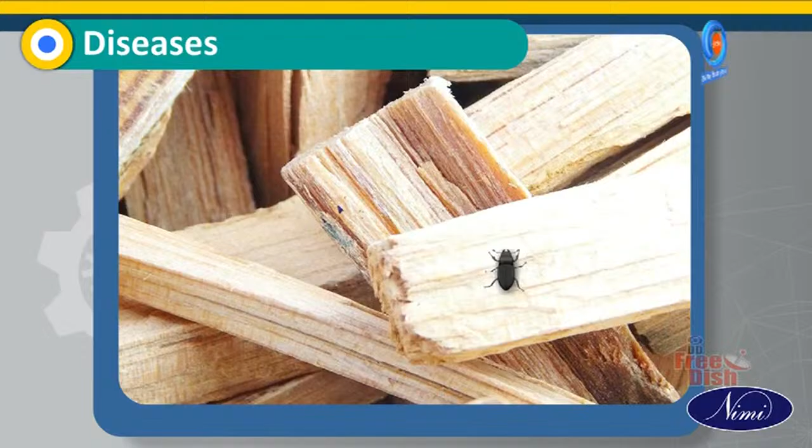The following insects generally attack the timber. Pinhole borers attack the standing tree or recently felled timber. Powder post beetles attack timber while it is stacked for seasoning, sale, or awaiting use for years. Termites or white ants attack timber used for structural purposes in buildings, bridges, poles, sleepers, fence posts, etc.

The following are the various causes of decay: alternate dry and wet conditions, improper stacking or storage of timber, and improper seasoning or unseasoned timber.

You can see this in this video. The wood can be easily affected by rain.

Other causes include use of unseasoned timber treated with preservatives, use of seasoned timber without treating it with preservatives, different types of insects, development of defects during growth conversion, improper use, improper position of structural members of timber, development of timber disease, and effect of natural agencies.

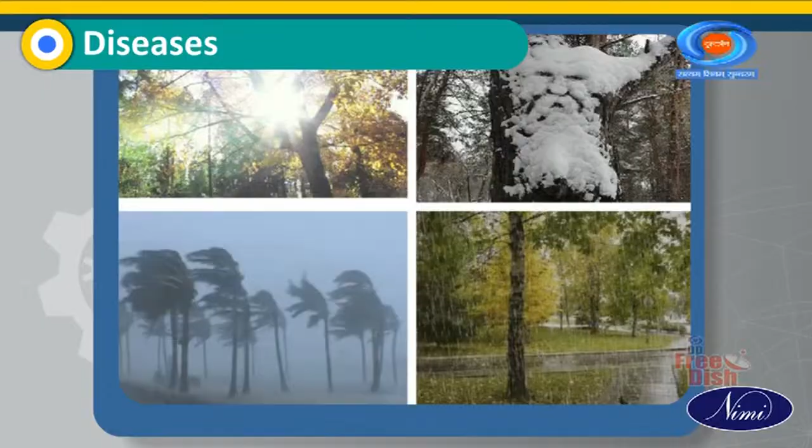Recap: In this video, we looked at defects in timber like knots, which are of two types, live knot and dead knot. Then we looked at shakes and its four types: heart shake, star shake, cup shake, and radial shake.

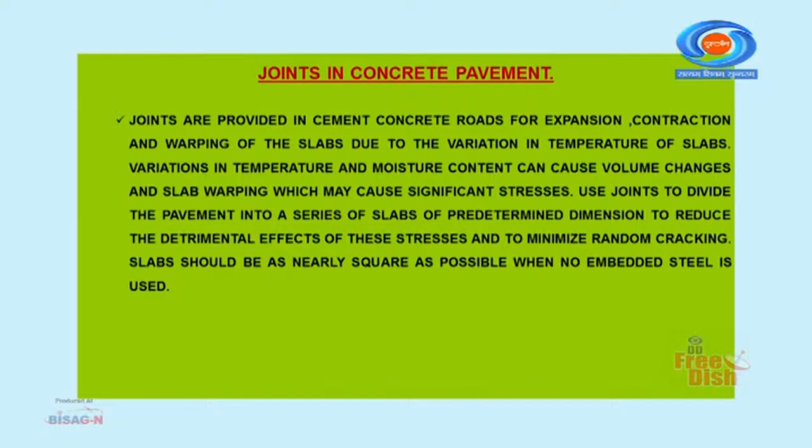Joints are provided in cement concrete roads for expansion, contraction, and warping of the slab due to variation in the temperature of slabs. Variation in temperature and moisture content can cause volume changes and slab warping, which may cause significant stresses.